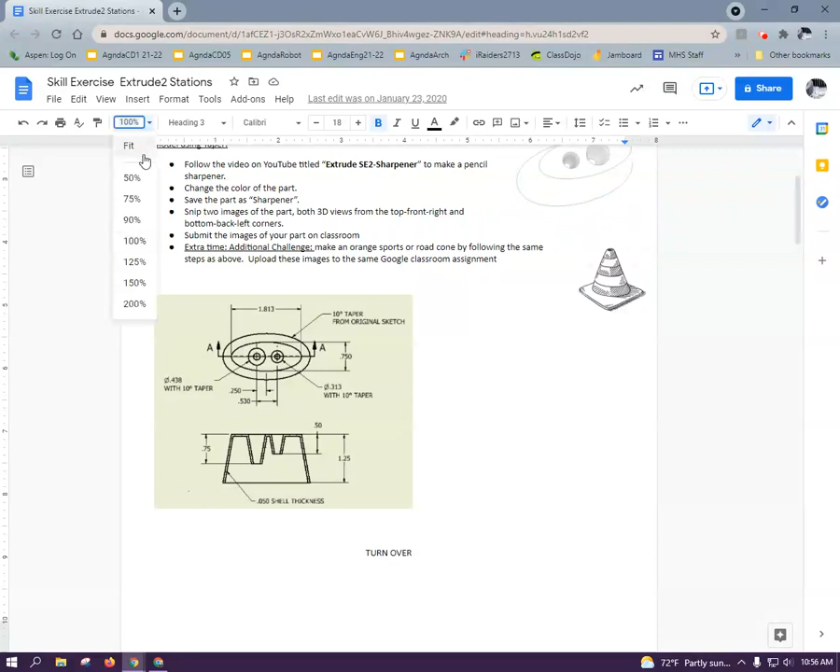This is going to be what your finished pencil sharpener looks like, and the drawing that we're going to use is going to be right here. So I will zoom in so you can see that more closely. So we are going to create a pencil sharpener with these dimensions. I'm going to go back to Onshape and go to a new part studio. So you will have created a part studio or a new document in inches.

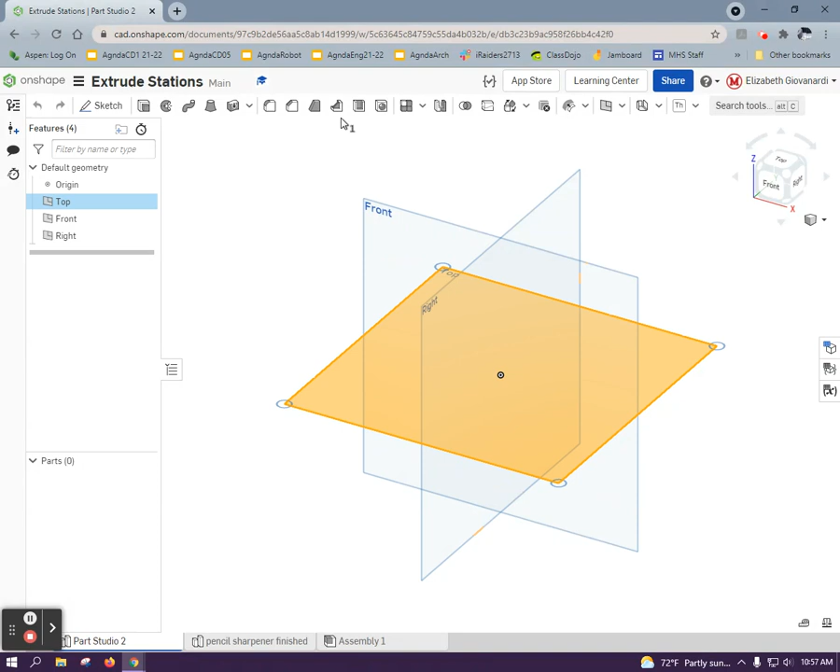And since our drawing is really shown from the top, I'm going to create a sketch on the top plane and then give myself a normal view. So first, we're going to draw an ellipse. Always start with your origin so that your part is locked down, and you can just click those two sizes and then come back and dimension it. So the dimensions on the drawing are right here, 1.813 by 0.75.

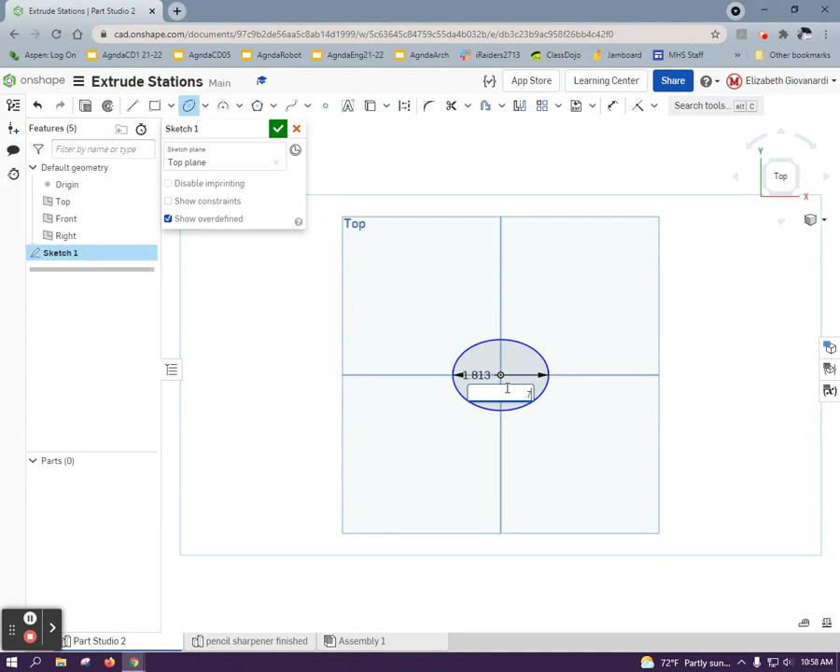So you can just start typing and it will accept it. And so there you go. You can see we have the right dimensions. And now we simply extrude it. We have a 3D view. And how tall is our pencil sharpener? It is 1.25 right there.

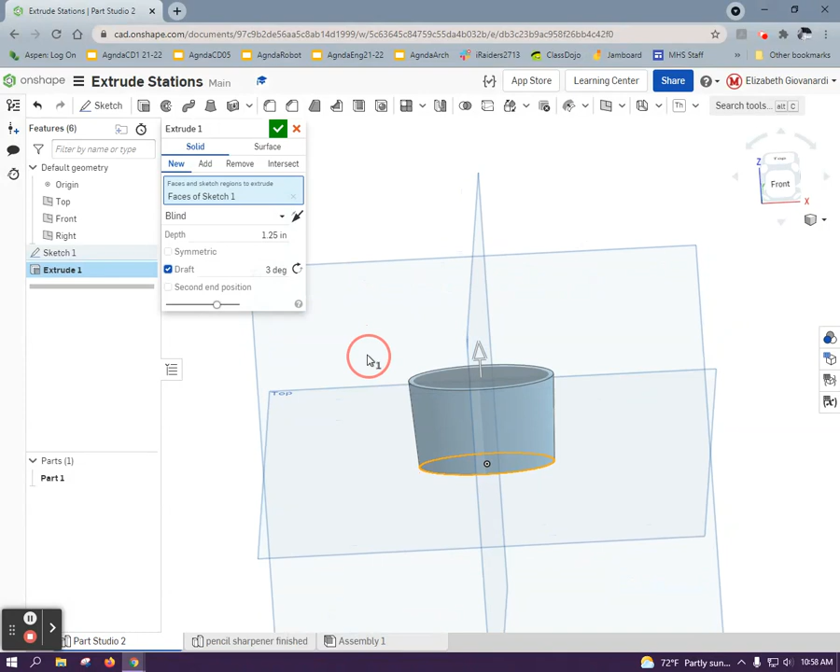Now here, to get it to actually be tapered, I'm going to hit the draft tool, but I actually want it to come down just so that it's still looking like my part did. And it has a 10-degree taper according to our drawing. Now, if yours doesn't look right, if it's tapering in the wrong direction, you can hit this arrow and it'll change whether it's getting bigger or smaller as it extrudes.

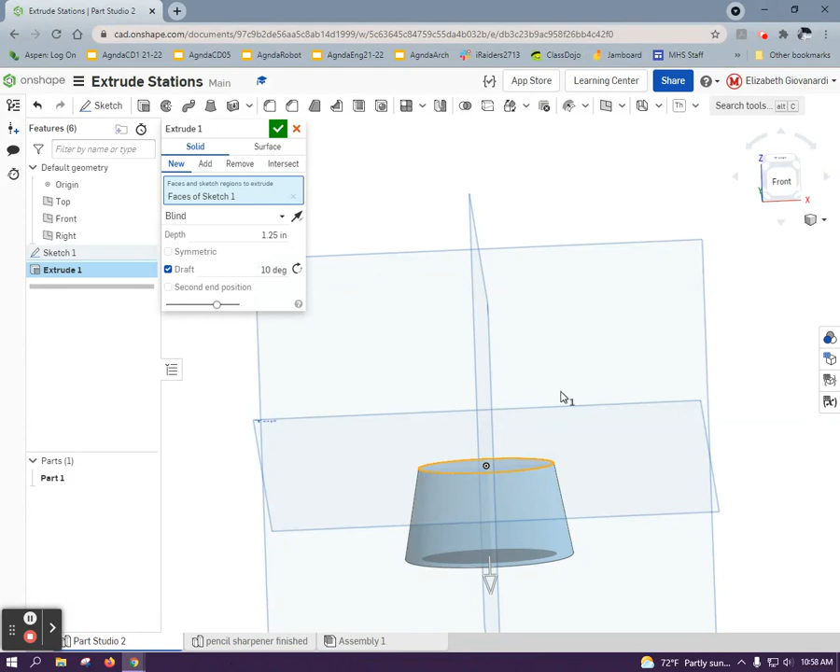I want it to get bigger because, as you can see in the drawing, the dimensions that you were given were the smaller side of the pencil sharpener, and then it grows as it goes down. And here's how you know it's the, sorry, where is it? 10-degree taper right here from the original sketch. Okay, so I'm just going to hit the green check, and we have our first solid part of the pencil sharpener. Now it's time to put the two different size holes in there.

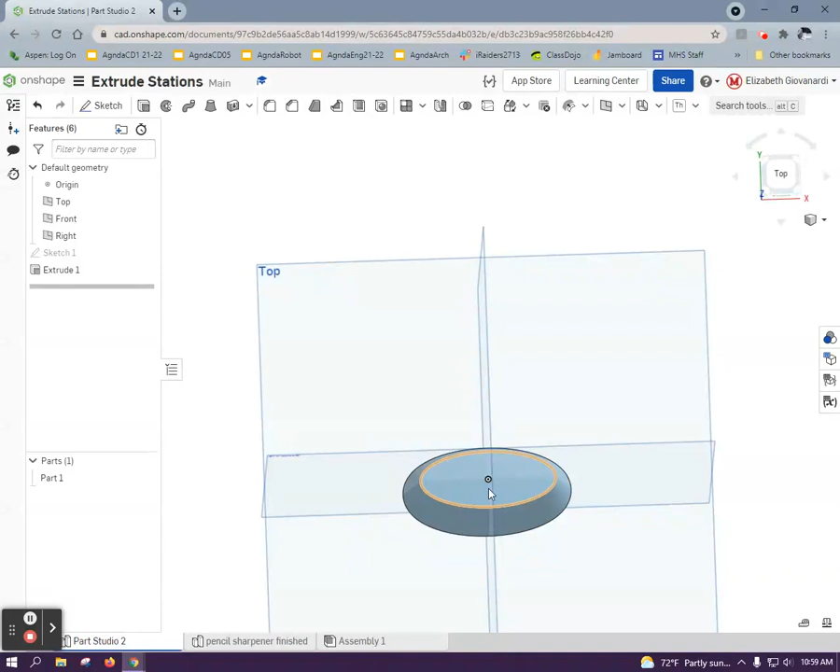So we're going to start a new sketch up here on the same top plane. And I'm just going to draw the two circles. And these are not equal size. So if you look, there you go, 438 and 313.

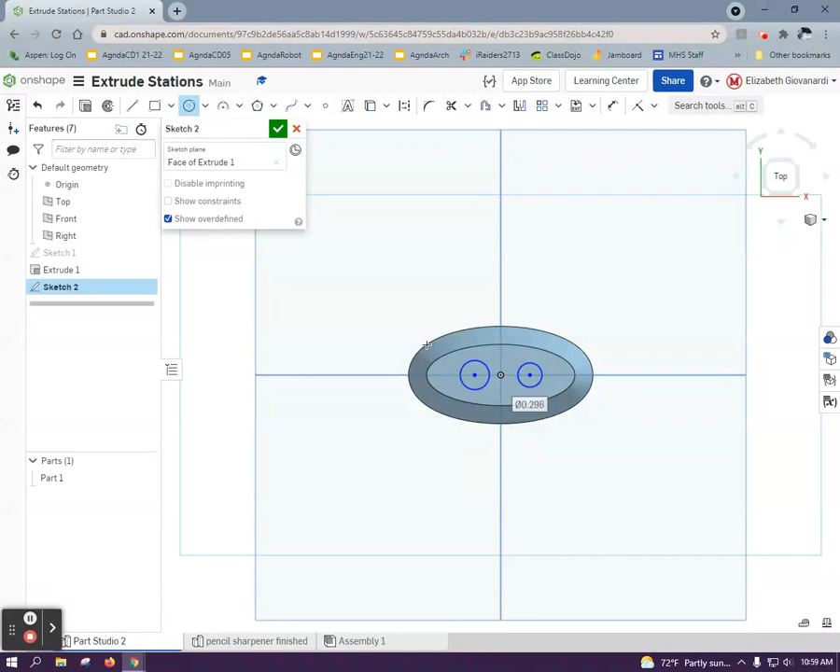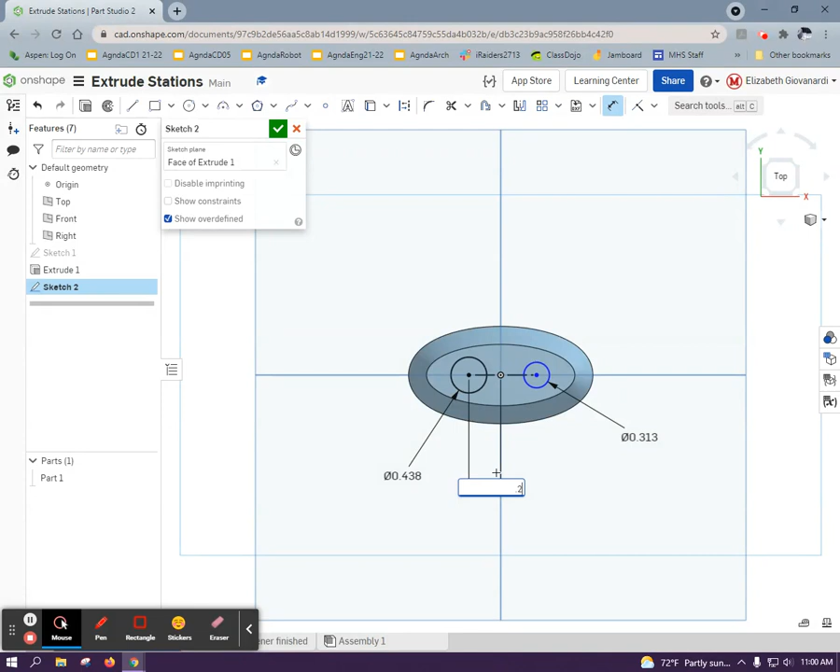And I'm going to draw a construction line so that we know how far they need to be and dimension that line. Or you could simply just dimension from the point to the point like I just did there. It's 0.25, and then the dimension you're given is from one circle to the next. And I believe it is 0.53. Let me look. Yes. So those are our two circles.

And now what I'm going to do is extrude that. Let me look at my sketch. So they are two different extrusion depths, so we're going to have to do that in two separate extrusions. There's no way to put different extrude depths in the same extrusion. So I'm going to actually say remove so that material is removed from our model.

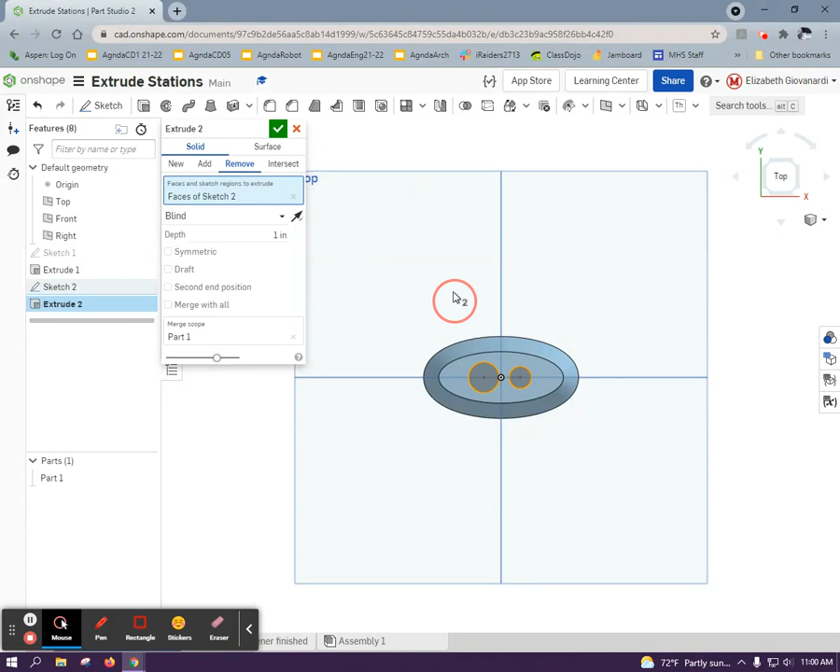I'm going to close this out because it's assuming we want both of those circles, and I'm just going to instead go and just select one circle. And you can see it's giving you a preview through the part. The depth of this one is 0.75, but again, we need it to taper or have a draft on it. And again, it's 10-degree draft.

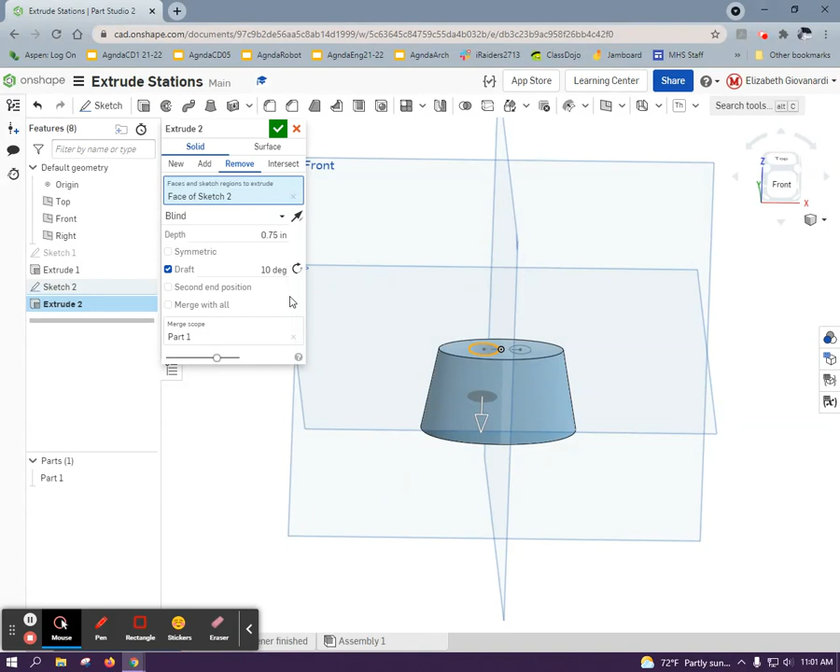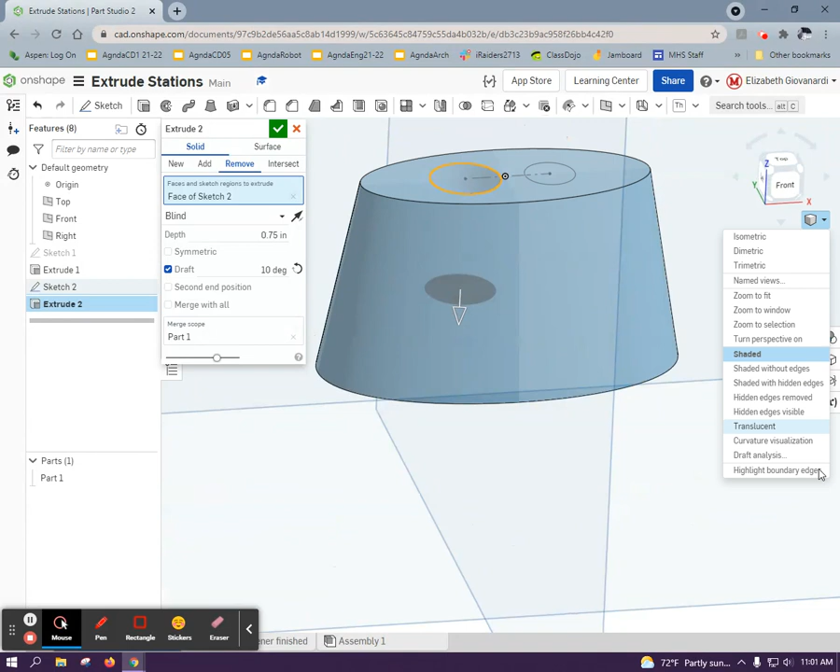And you want to just look and make sure that that 10-degree draft is making the part get smaller as it goes instead of larger. And if it doesn't look like it's doing it, then go ahead and hit the opposite direction. Now you can see that there's a smaller preview circle in there. It's hard to see because you don't have a cross-section view on. I can turn a cross-section view on, I guess once I'm not in the extrude menu. Let me see. Here we go, section view.

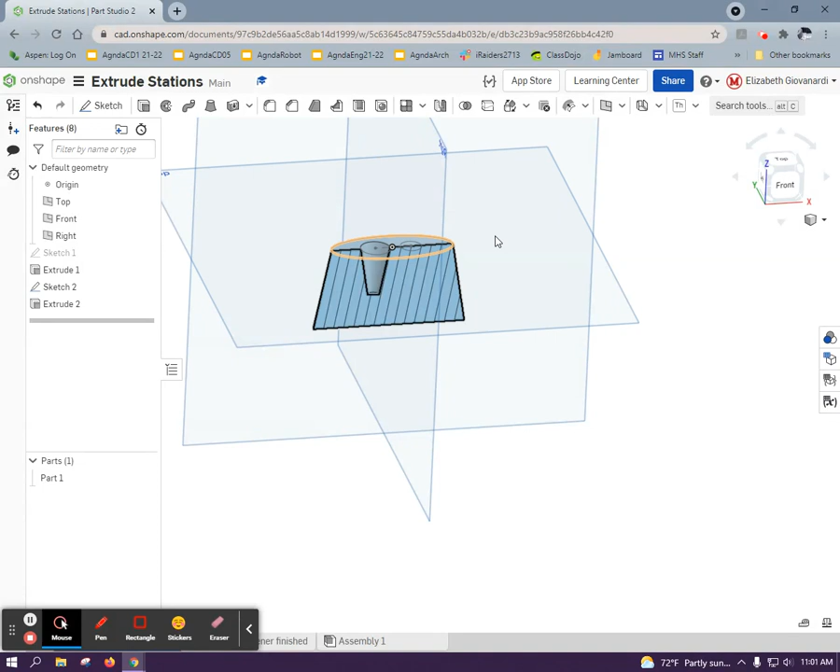And I'm going to zoom out and make sure I get this plane to cross-section view. Now you can see it's tapering down. So let me leave that view on just so we can reference that. And now you still have this sketch, so I'm going to turn this sketch back on so that we can reference that second circle on there and hit extrude again and just pick that surface to be extruded. We're going to remove material.

You might notice as soon as I clicked remove, it switched the direction because it assumed that in order to remove material, you have to go down into the part. I'm going to go ahead and put my draft on, 10 degrees. It may not like that because right now we're tapering in the wrong direction anyway. If I click this, do you see how it gets down to a certain point and then it doesn't even get to the distance we need? But that's okay because that's too far of a depth anyway. If you look at our drawing, the depth of this one is 0.5 as opposed to the last one, which was 0.75.

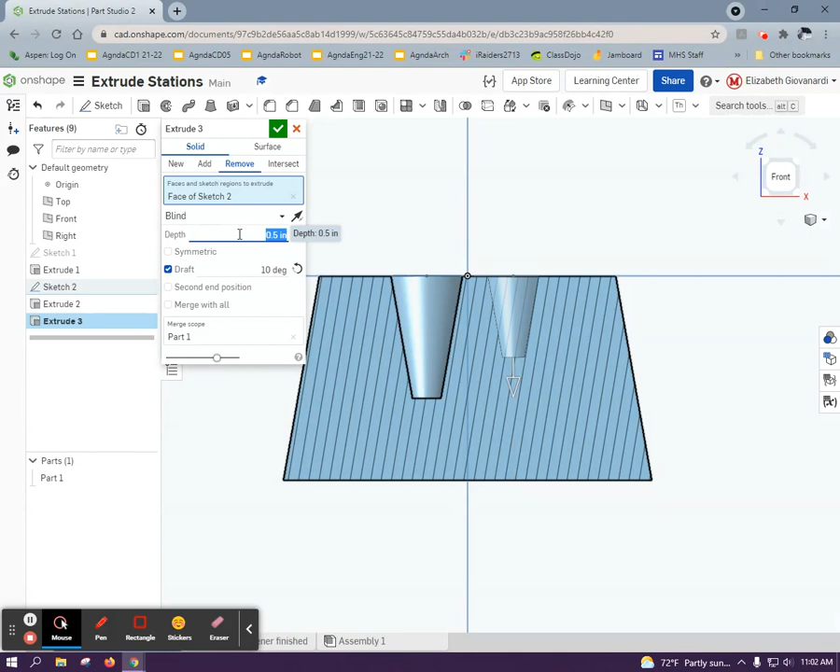Okay, so now you can see we have two holes. They're being tapered, and we are just about done. The last thing we need to do is make sure that this is a hollowed pencil sharpener, because as you sharpen your pencil, you want your shavings to be able to fall out through the bottom of the hole or through the slot and then out through the bottom of the sharpener itself. So to make it hollow, we use something called the shell command. And what shell does is it gives a consistent wall thickness to the entire part.

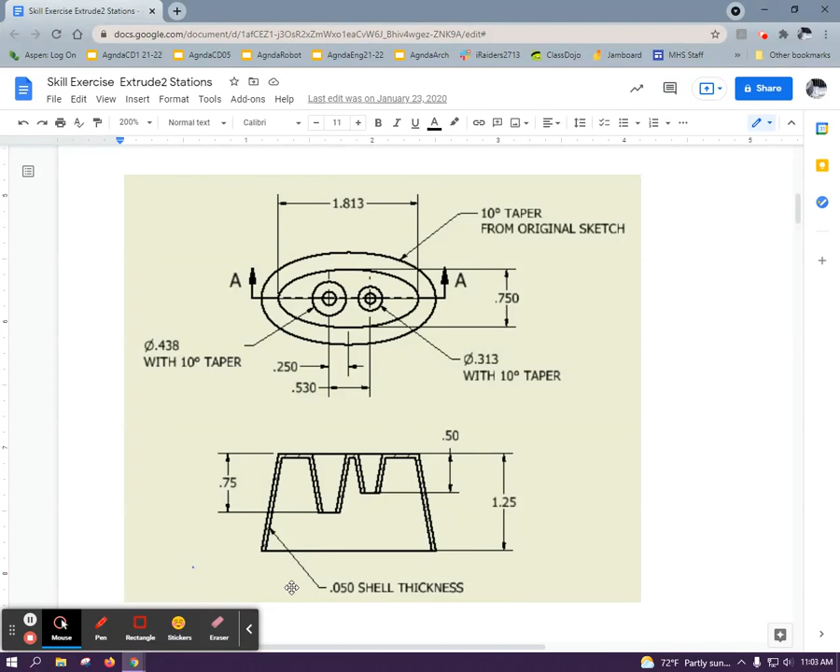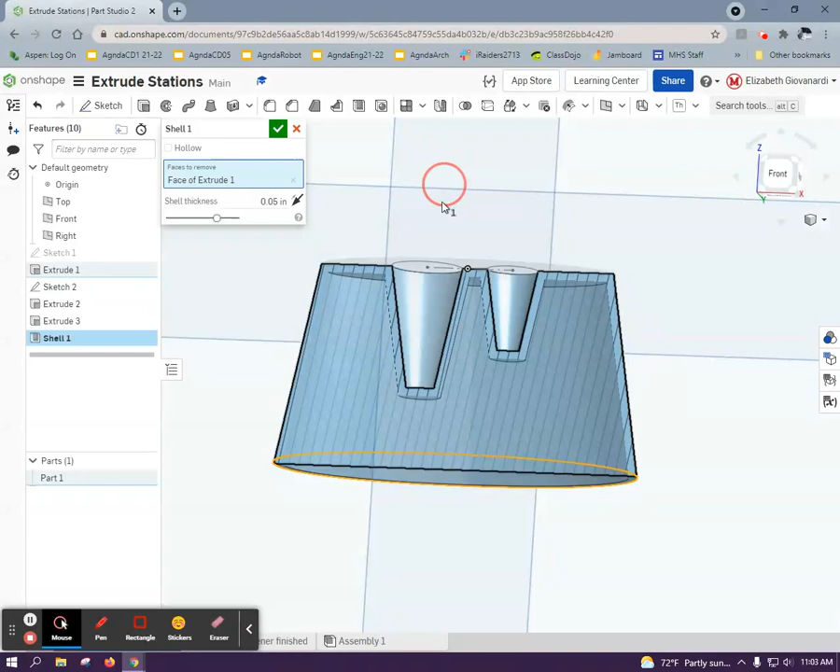If you look at the drawing, I'll show you, it says 0.05 shell thickness. So that just means this wall thickness everywhere is 50 thousandths of an inch, or 0.050. I'm going to type that in there. Faces to remove means which part do you want to not have a face on it anymore. And we don't want the bottom to have any face on it, so I'm going to click that, and that'll automatically also select this part for us. So now you can see it's giving me a hollow part.

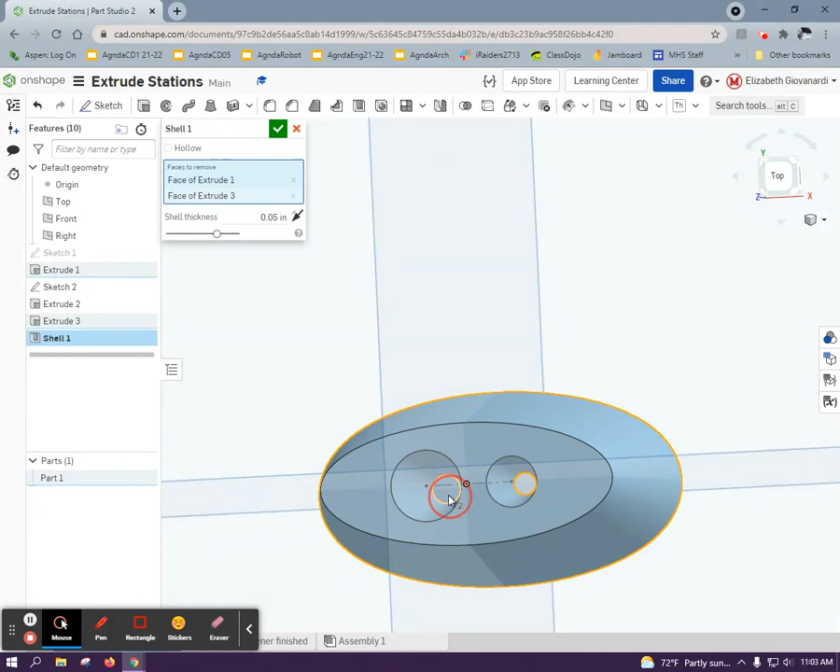The last thing I want to do though, let me turn off now my section view so that you can see what's going on. So you can see it's now hollow on the bottom, but it's not hollow on the bottom of these two holes. So I'm going to come up to the top view and select the bottom circles so that those also get removed. So think of faces to remove as just where do you not want material when you're shelling it. So now if I hit the OK button, you can see my model looks like what it's supposed to.

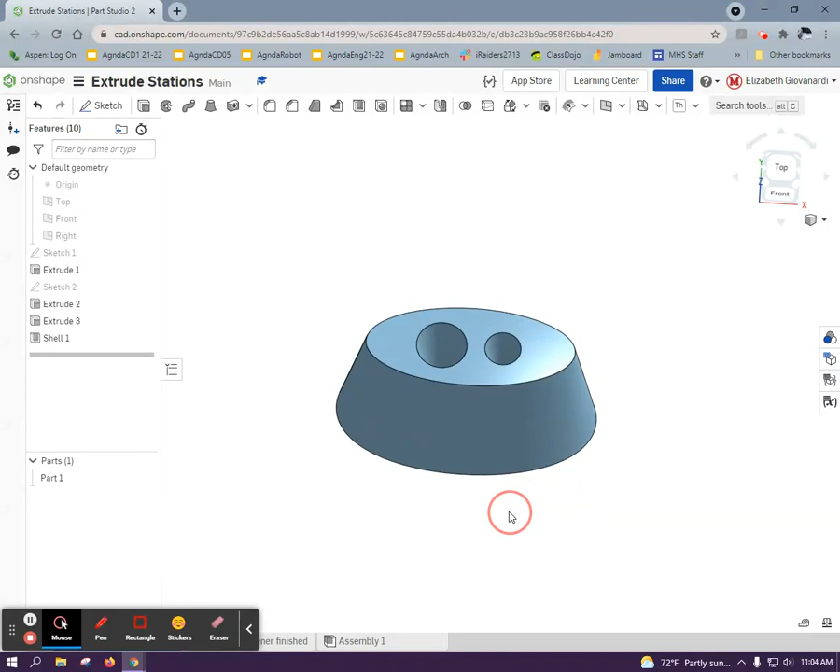I'm going to turn this sketch off again because we don't want to look at that. I'm also going to turn off my planes. I'm just turning off the visibility of them as well as the origins, just so it looks like a nice pencil sharpener there. And now you can see it looks right. The last thing I would like you to do is change the appearance. So pick a material, or sorry, we're not going to change material. Pick an appearance color. So pick any color you want. Let's say I'll go with a funky magenta of sorts.

And then the last thing I would like you to do is assign a material, and that's so that we can check the mass properties. So you can just use the material library. Let's make it an acrylic for now, which is just a plastic of sorts, and leave everything default. And that way, you can do a mass properties check.

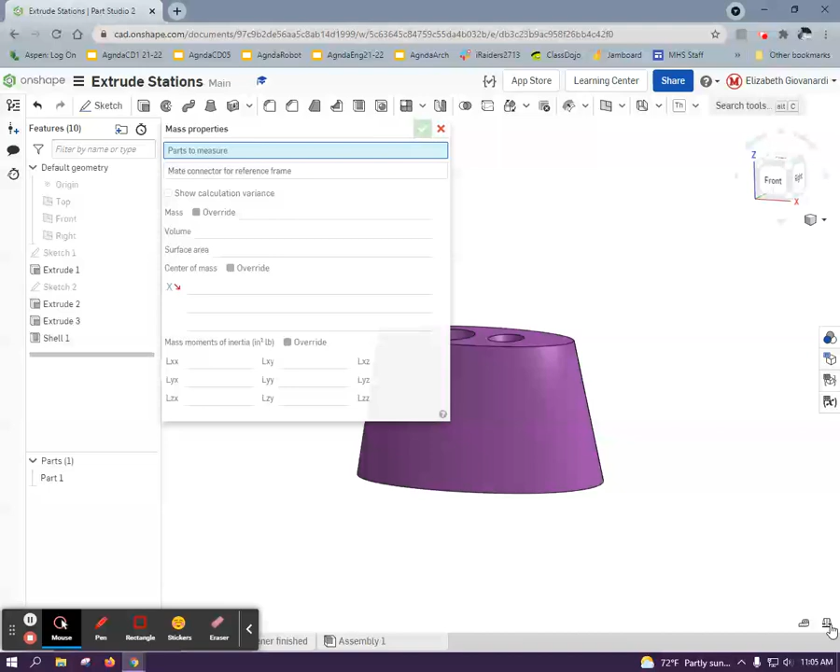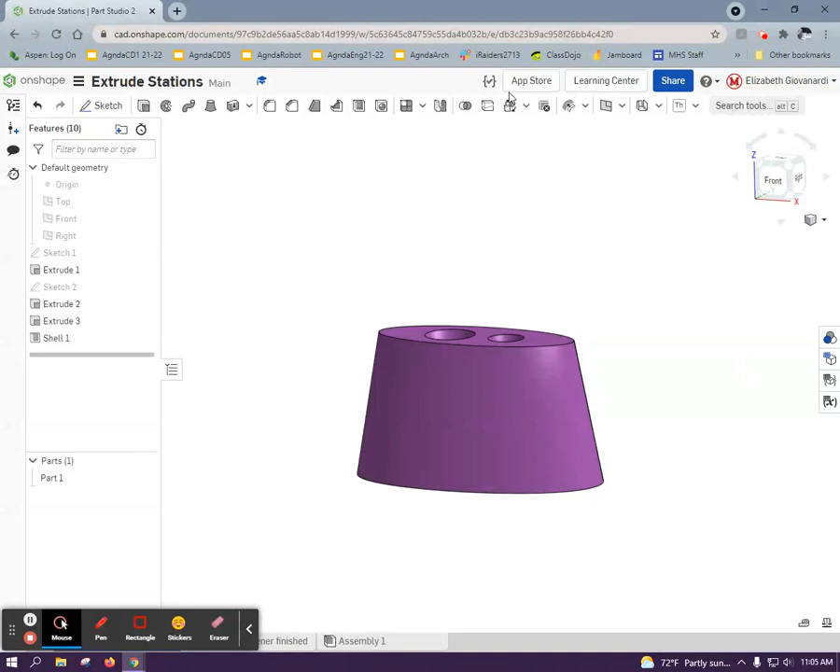And I made the mistake of not selecting the actual part itself, and now you can see what the mass is. So on your worksheet, you can give me what the mass is in pounds or kilograms, well, no, I guess you were supposed to do this in inches, so keep it in pounds, and then snip an image of all of that. All right, that's it for the pencil sharpener.